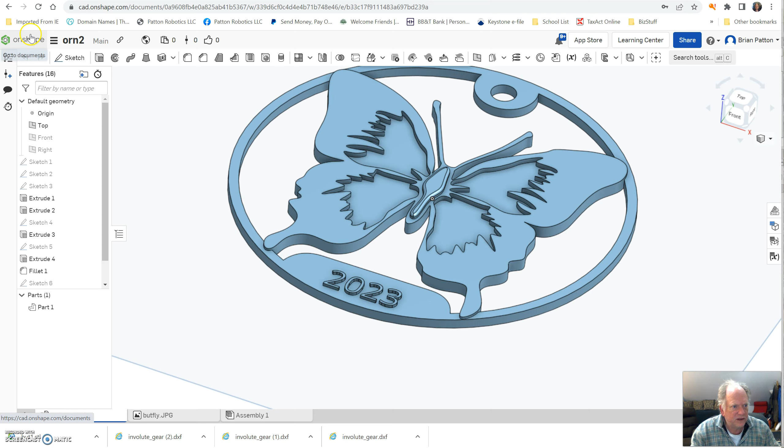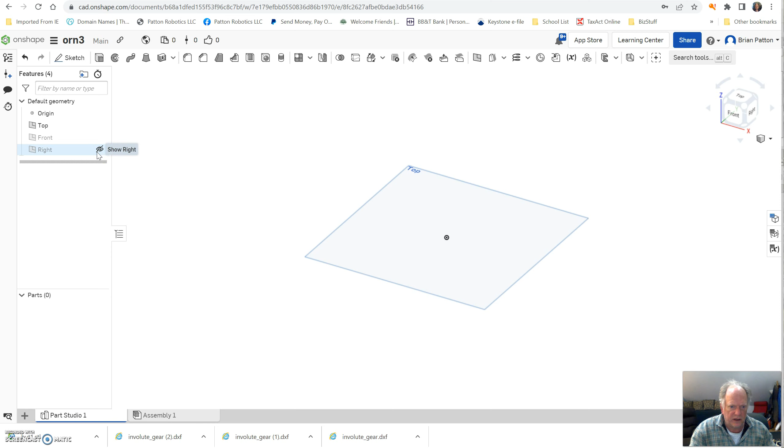So let's get started. I'm going to create a new document, and I'll call this Ornament 3. Now the first thing I'm going to do is decide which plane I'm going to work on. I'm going to look at this thing top down, so for the moment I'll hide my front and right views and look at it straight down.

Now I'm going to create a sketch to work on, and I'll start by creating the frame that I want to put this in. I'm going to ask my students to give me an 80mm maximum size for this thing to sit in. This is probably about 50 - when I printed it, I wanted to print quickly, so I shrunk it down.

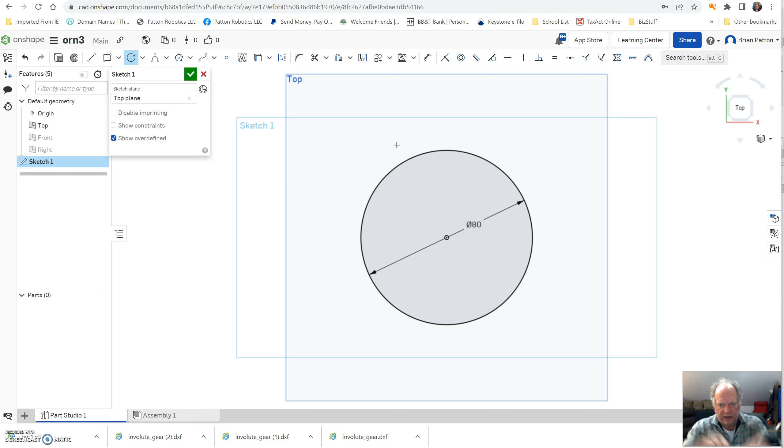So here's 80, and I want to make this ring right here, in this particular case, because I'm going to try to duplicate this on the fly. So I'm going to have another ring inside of it, and I think I'll make that one 75. Okay, so here we go.

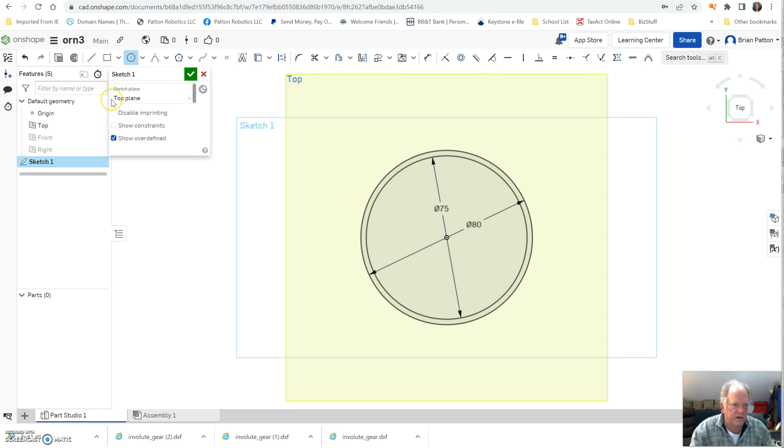Now I've got my basic shape, and I want my ornament or design to fit inside this ring. So for the moment I'm going to check that off.

Now I'm going to create yet another sketch on this plane, and this is where I'm going to put the image that I'm going to trace. I'll do that by coming over here and inserting an image, which I have to import.

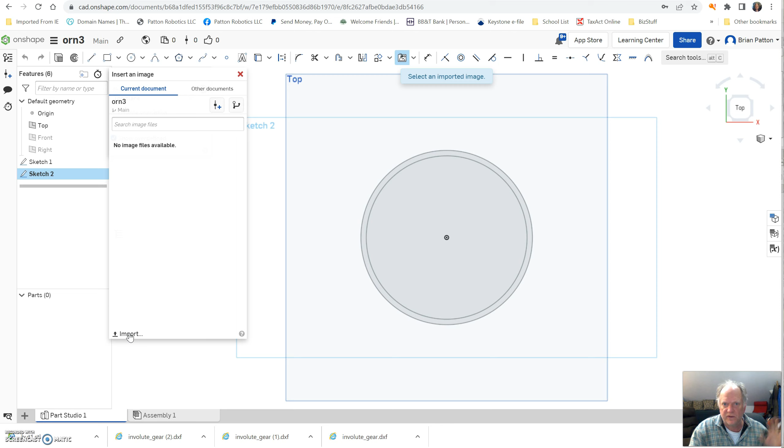Now I found an image already online. I searched clip art free butterfly, and I pulled it off the web, and I have it right here. I'm going to select it first, and then we're going to put it right here. I'll close that.

Okay, so now I need this guy to fit inside my ring. I want the wingtips in this ring right here. So let me go ahead and scale this guy down - I'm going to hit the transform. I definitely need to bring it down quite a bit, and move it on over. I think I need to bring it in some more, and let's get it maybe something like that. Let's see what it looks like.

Well, I actually need a little bit more. Let me pause it, and I'm going to work on the details because I want these parts of the wings also on here, so I might have to fiddle with it for a moment. But give me a moment, I'll be right back. Okay, I think I got it.

And so now I'm going to click off on that. Now what I want to do is go back to my original sketch. I'm going to add this hole for hanging it, and this little place down here to put some information on. So I'm going to zoom out on that. We're going to work back on sketch 1 - I'll double click it.

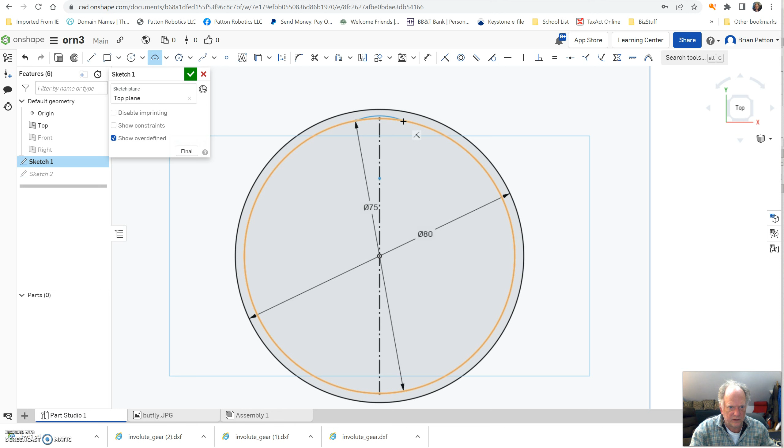I'm pretty happy with that. Okay, hit enter. And now I'm going to go ahead and put a hole right about here.

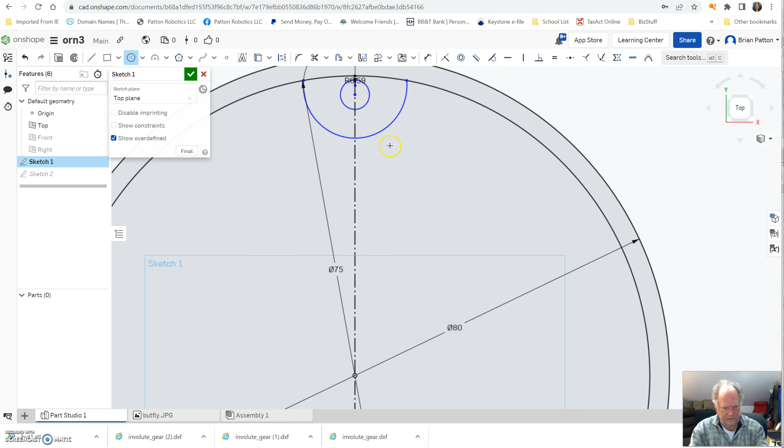Alright, that looks good. And let's take and clean up some of this stuff here. We're going to cut that, and we're going to cut that.

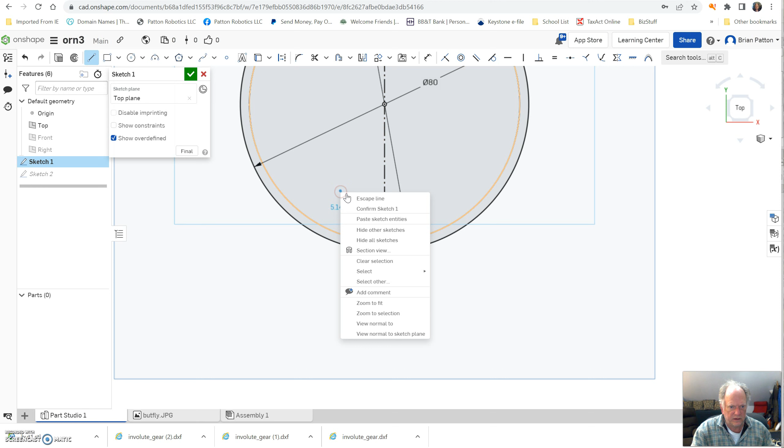Now I'm going to come down to the bottom, and I'm going to put a little bit of a line here, maybe something like that. And then I'm going to use an arc. This one here, click it there. Click it there. I don't know, something like that. Looks good to me. Okay, excellent.

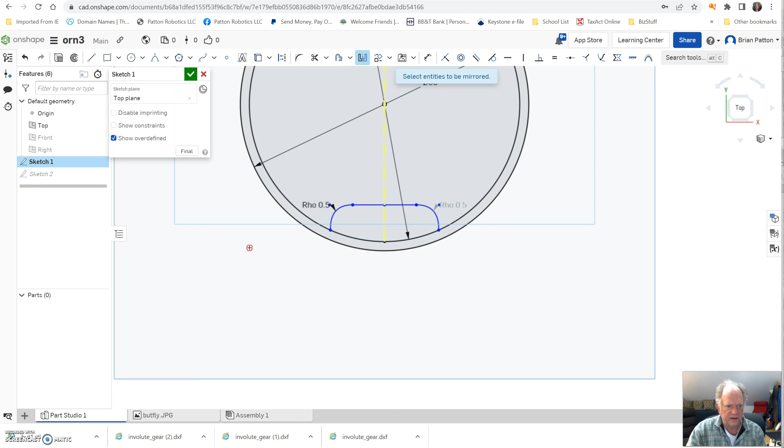And now I think what I want to do is mirror that on the other side. So let me click this, and I'm going to select my mirror line right there, and mirror that, and mirror that. And we are done with the mirror.

Now I'm going to go ahead and select my construction line and delete that. The next thing is just to cut away that arc right there. Okay, I think I've got that pretty much finished off. Let's click that, and you can see our butterfly — everything fits beautifully.

So now it's time to start tracing out the outline of the butterfly itself. Once again, I'm going to create myself a new sketch on the top plane. And let's zoom on in here.

I'm going to use the spline tool. You can actually make these — you have to click for some points, and you can edit them. Oops, wait, I don't want to do this one right now. I'm so sorry, I want to do the outside.

Okay, so let's get out here. We're going to start on the outside of the wing, and we'll put a few points because we can curve them, and we can actually move these points. We'll be able to reselect those spots.

Now what I want to do is try to avoid actually getting it stuck on a line. I can delete those points, but it'd be better off to just avoid it right from the get-go. Like, I don't want to click that — if it turns orange, it's going to get stuck there, and then I have to go back and delete that point. I just don't want to do that.

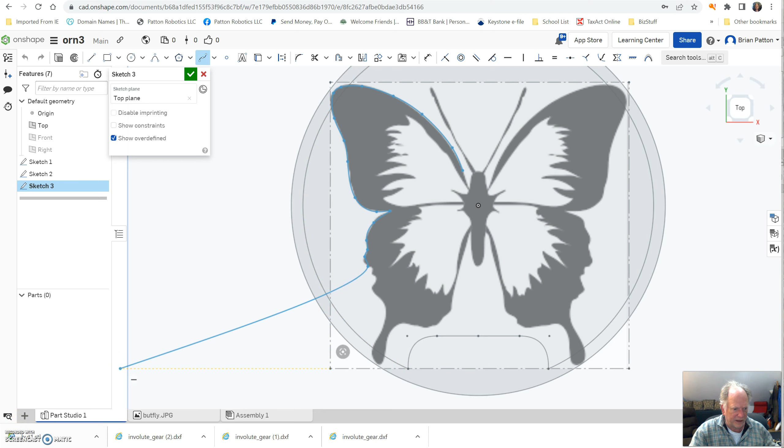I'll be right back. Okay, so I quickly traced around it. Didn't spend a huge amount of time on detail, but it's good enough for what I'm doing right now.

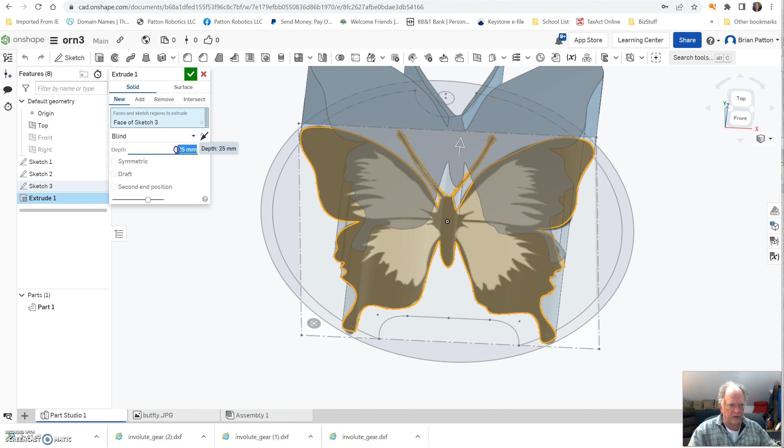Next thing I'm going to do is select this area and raise it up, I think 3 millimeters, something like that. That looks good. And then I want to come back and select just that region right there, and I'm going to raise it up 2 millimeters.

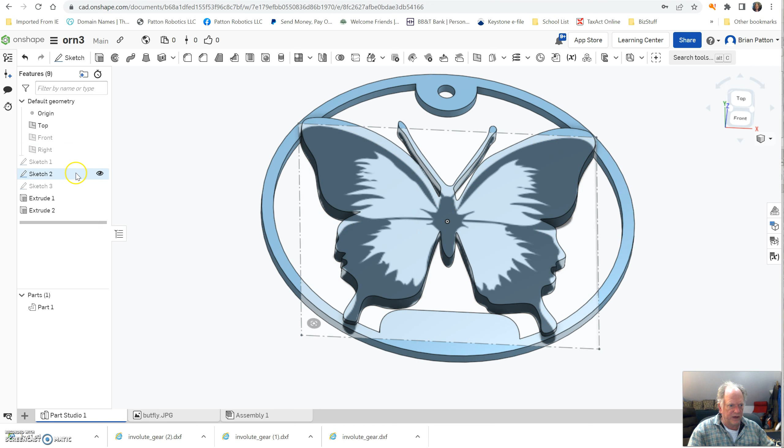Okay, and you can see already, if I go ahead now and hide my sketch, that we're getting there. Okay, it's already looking pretty good.

So now let's go ahead and do the inlays of the wings. I'm going to go ahead and turn this on again. Actually, for the moment, I'm going to hold it off. So I'm up 3 millimeters.

So I'm going to select this region and make a new sketch plane on the surface of the already extruded wings. I'm going to put a new sketch surface right there, and then turn on this drawing plane, and do the same thing you guys told me to do just a minute ago, but now I'm going to focus on these parts right here.

So once again, I'm not going to make you watch me do this. I'm going to pause it, and I'll be right back.

Okay, so I've done these two, and I'm going to save some time here. I'm going to go ahead and create myself a construction line. So I selected this and this, and I'm going to run it right down the middle, like so. And I want to mirror it. I'm going to click on mirror. Here's my mirror line, and I'm going to choose this and that.

Okay, and we're going to hope that that's good enough. I'm going to escape my mirror, and now I'm going to go ahead and delete my construction line. Come on, there we go. And we're going to say that is done.

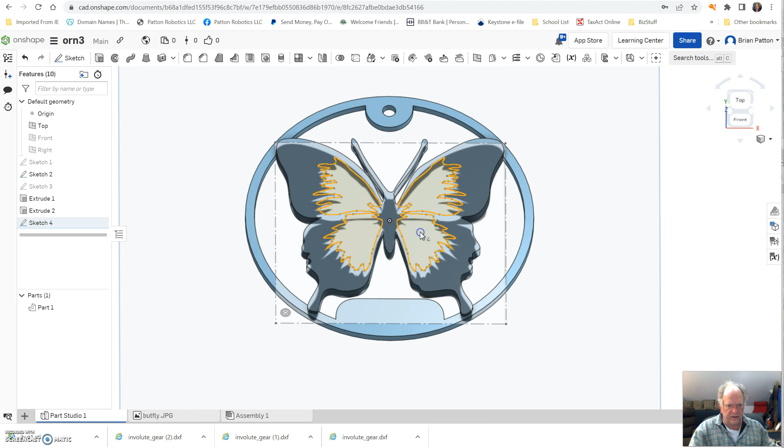Okay, now what I'm going to do is select this, this, this, and this, and we're going to extrude it. We're going to remove material, and we're going to remove, say, 1 millimeter from it. And we're going to say OK. And now, when I hide my image, all right, we're getting much, much closer.

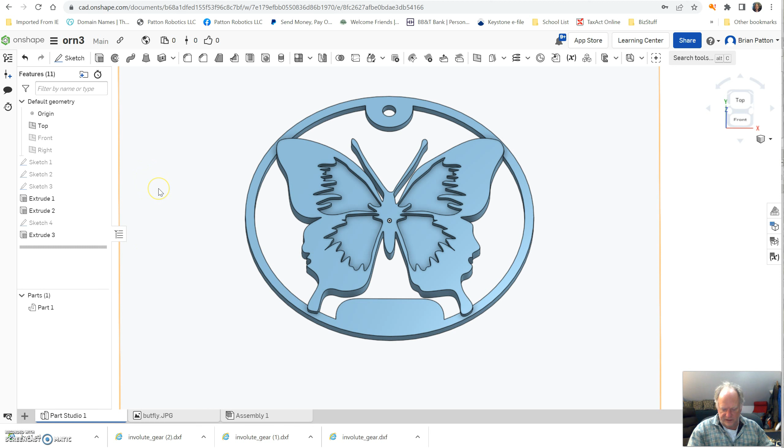Okay, so now the last thing I think I want to do in my remaining couple of minutes is add a body to it here. Okay, so I'm going to look at it top down, zoom back in a bit. We're going to add our image back in so we can see it.

I'm going to select this surface one more time. Alright, I could actually put it on the same one. No, I'm not. I'm going to go ahead and select the surface, and I'm going to add a new sketch. And now I'm going to put some kind of a body on this thing.

So we'll start... I don't know, start down here, bring it up, curve it out a little bit. Well, I'm not doing a very good symmetrical job, but that's all right.

All right, give that a moment. It's taking a while, the web is running a little slow. Let me pause it. Okay, so we don't have a lot of time, so I'm just going to go ahead and say that's good enough.

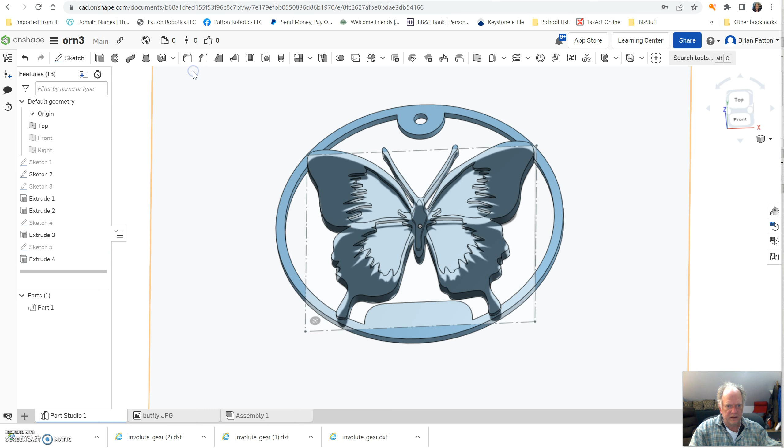And I'm going to select our new little region right there, and I'm going to extrude it up 1 millimeter, like so. Okay, once again I'm going to hide that. Now I'm going to come in here.

Let's rotate this a little bit more. And I want to select just that top ridge because I think I want to use a little bit of a fillet on there. Ooh, that worked out really nice. See how I got it rounded the edges? I think we're good with that.

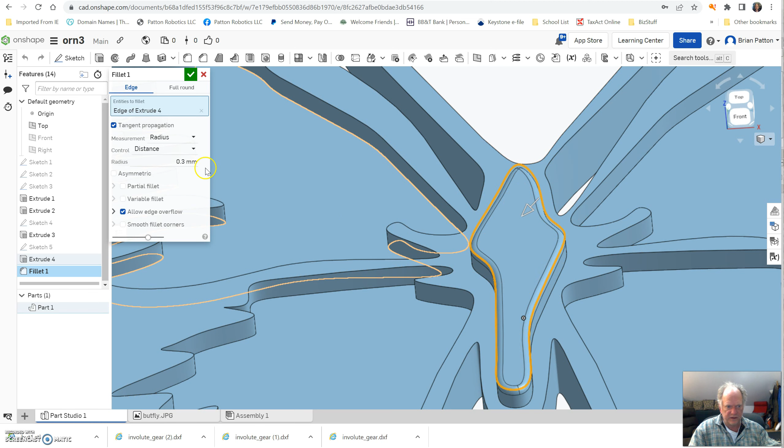So we've kind of cleaned up this body a little bit. And the last thing we want to do is put some kind of emblem on it. So I'm going to zoom back down, choose this surface, and add a new sketch. And then from there, I'm going to choose the text tool, and let's put in there '2023', something like that.

And boy, it's running slow. Let me pause it while it chews on this. Okay, looks good. Let's take that. Let's select our 2023.

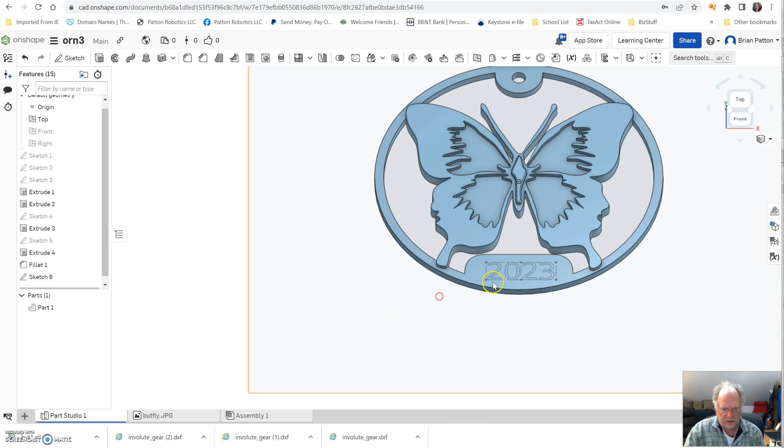And let's bring it up. Oh, I don't know. How about... you know what, let's bring it in. Let's take it in, let's remove. This is different than what I did before, but I think it'll look good. We're going to remove 1 millimeter, and it's going to be inset. And there you have it. Not my finest work, but for less than 15 minutes, I think it looks pretty good.

And of course, from here, you can select it all, and you can export it as your STL file.